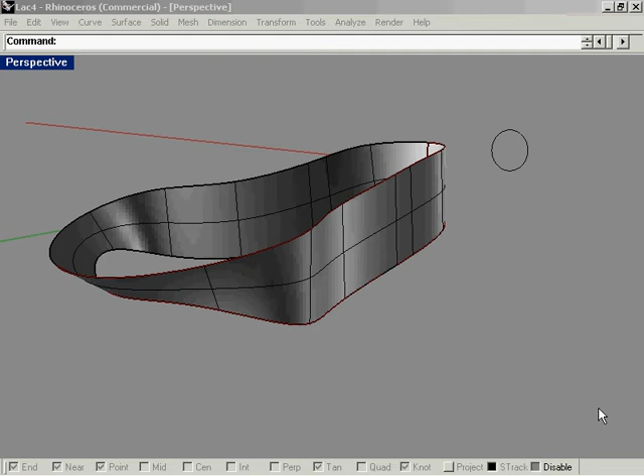Alright, so at this point we've created the rough sketches from the geometry that we had worked on before. And in this case, I've actually brought in one of the sketches that I was working on as an underlay, as a background bitmap, using the same techniques we've used before into my right-hand view.

The general strategy that I'm going to use here is to actually create the main surfaces first. Now, in this situation, main surfaces are really not all that visible because they're going to be cut out tremendously. So your main surfaces are actually what's going through here in between the holes. So you've got like a poly surface that will be consisting of something of a section like this, where you've got a chamfer on top and a longer, bigger surface in here, which then gets cut into, and then a chamfer running along the bottom as well.

Now, I'm actually going to add a little bit of a flat, like a ribbon or a rim running along the bottom, just to give a little bit of resolution to that bottom surface, make it a little bit stiffer, possibly give some more space for all these extruded holes that are going to go through for your pocket creation.

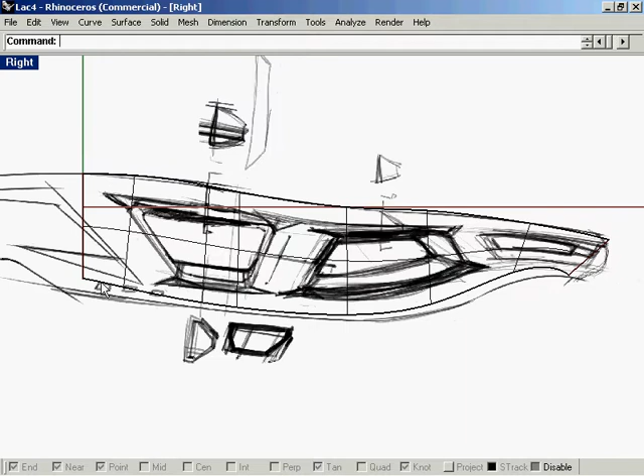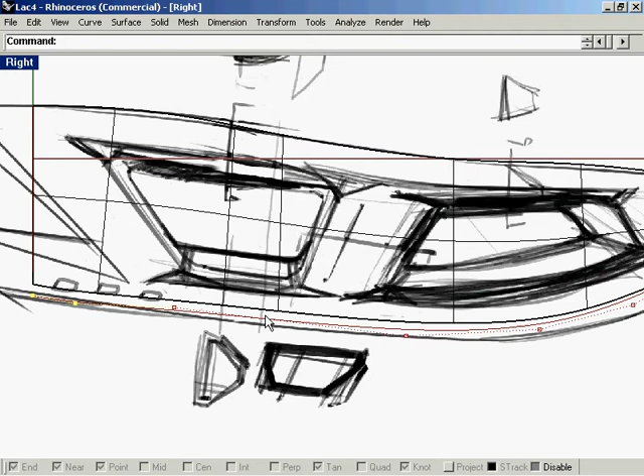And let me go ahead and just modify this geometry somewhat. Make sure that all the control points are turned on. Notice now, if I just modify the bottom control points here, now the curves are approximately following this curve right now because we didn't modify all the lines. So make sure that all the control points are turned on, and let's move that down.

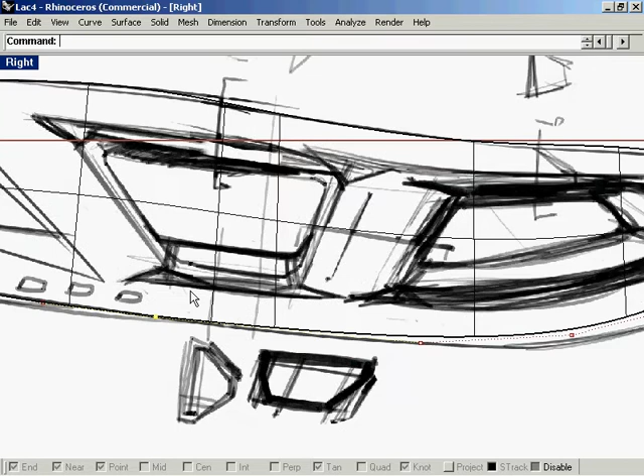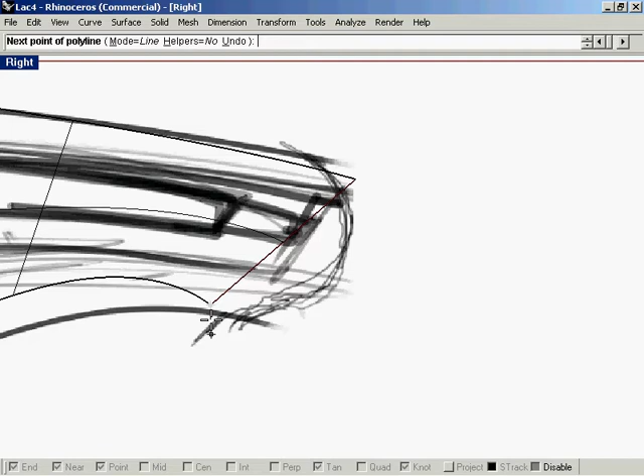I'm going to leave this geometry more or less similar and put in a polyline at the front to create that rim we were talking about. And I'm going to make that roughly tangent to the profile, 4 millimeters in length. So now it's constrained, roughly tangent. And let's do the same thing at the rear here. 4 millimeters. Okay.

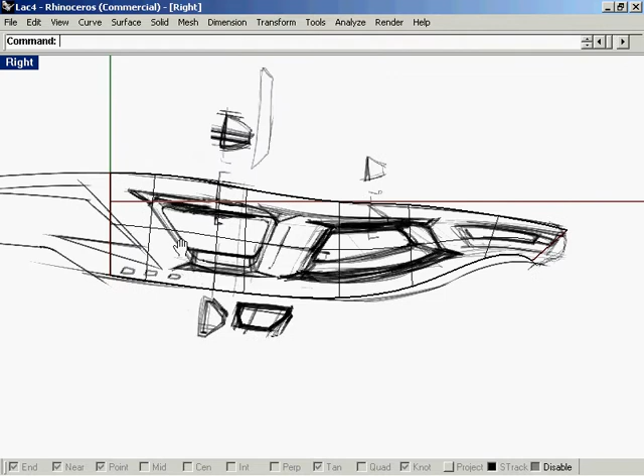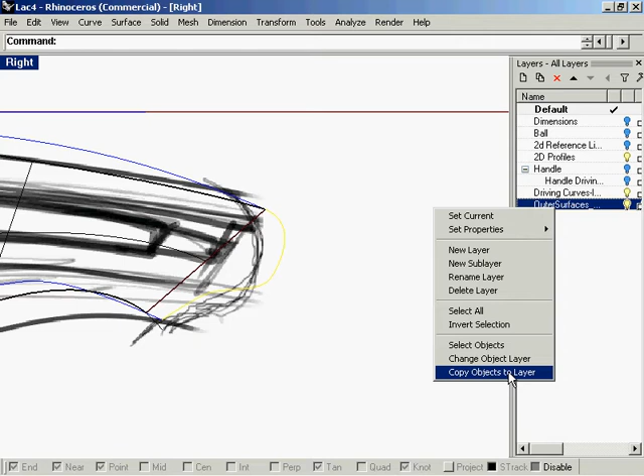Now we have a line here. I'm going to create a new layer called outer surfaces curves, and Copy Objects to Layer from the older 2D profile.

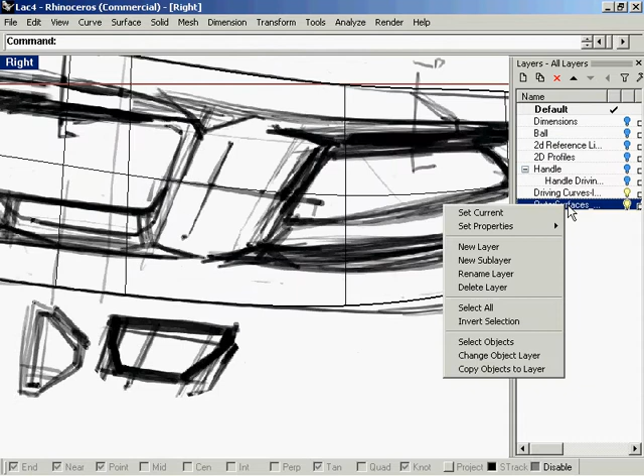And I'm also going to, well, actually, let's modify that right now. Well, I'll assign those rim curves to this outer surface layer as well. Okay, turn on the control points for that and snap it to the rim that we're going to create. Cool.

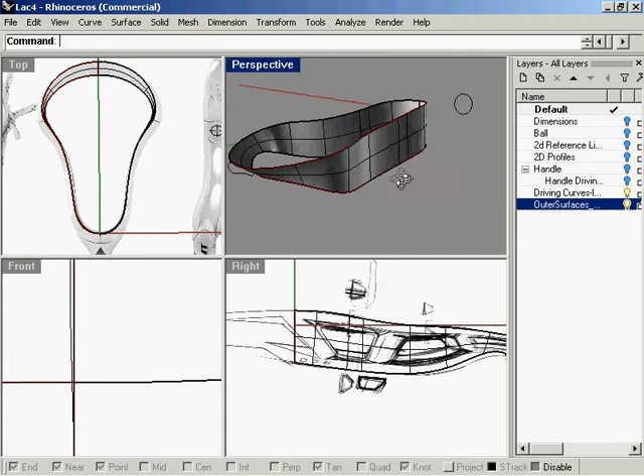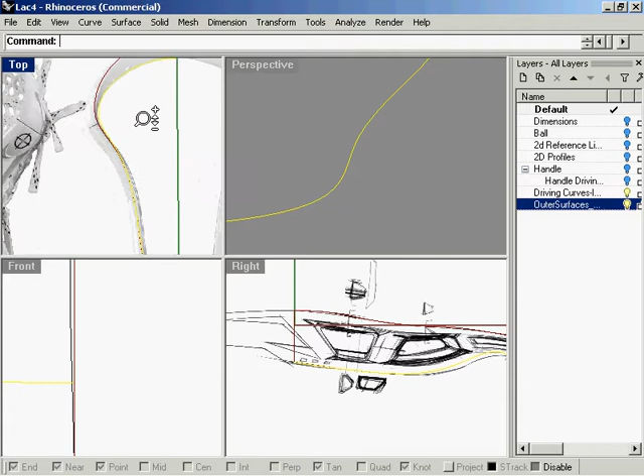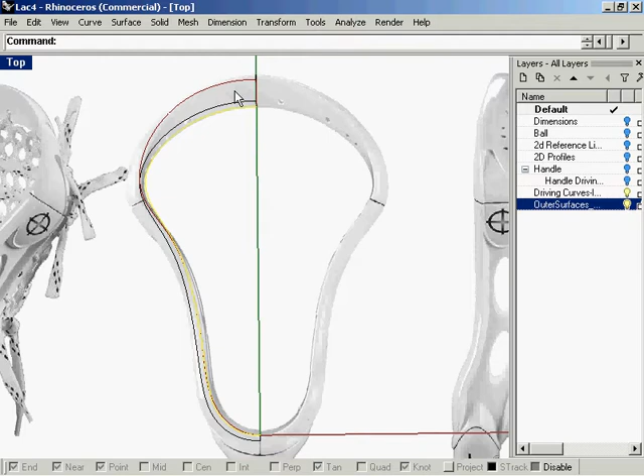Alright, so now let's go ahead and I'm going to offset this curve now. Hide that inner surface. I'll hide that inner surface too. Simplify things a little bit. And offset curve by 4 millimeters. Now this is going to be just for our reference only, because now if you turn the control points, you'll see that it is a very big or a very heavy curve. I'm going to use that as a scaffolding or just a reference point now to scale the existing curve for the inner surface.

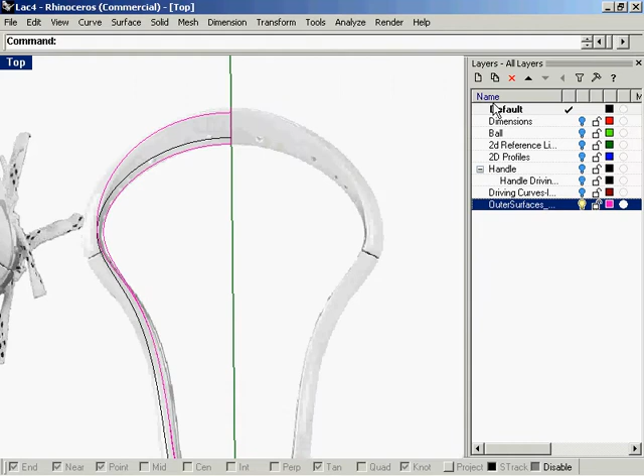Copy that object to the outer surface's curve layer and do the same thing for the top curve as well. In this case now, I think I'm going to hide those curves. Now they're all black. Maybe it's better off to change the color to something more visible, purple, since it's the same black as the color for the default layer as well.

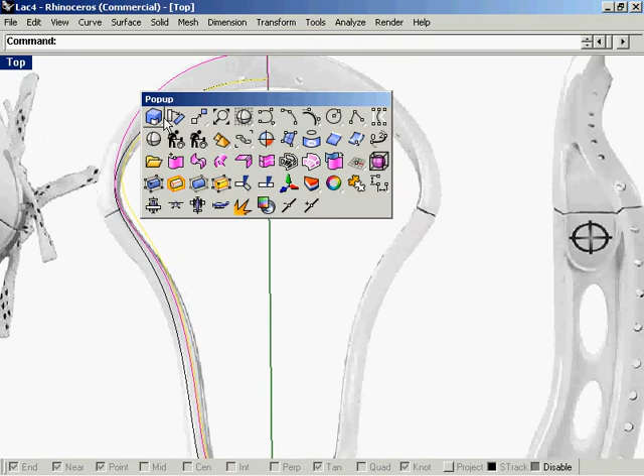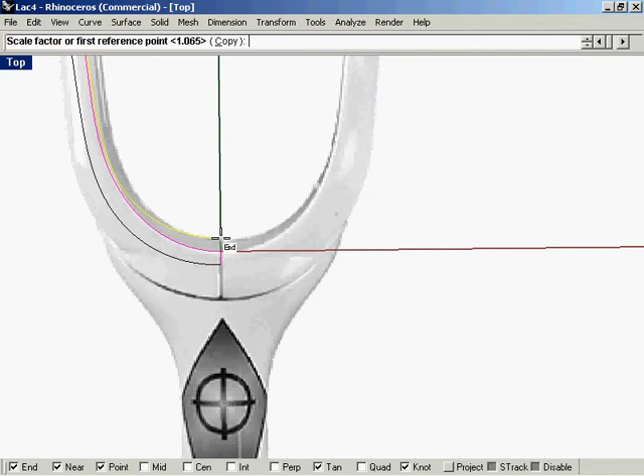Okay, let's now move this curve to the end of the line there, and we'll do a 3D transform. That didn't end up right. Let's try that again. From the top here, there you go.

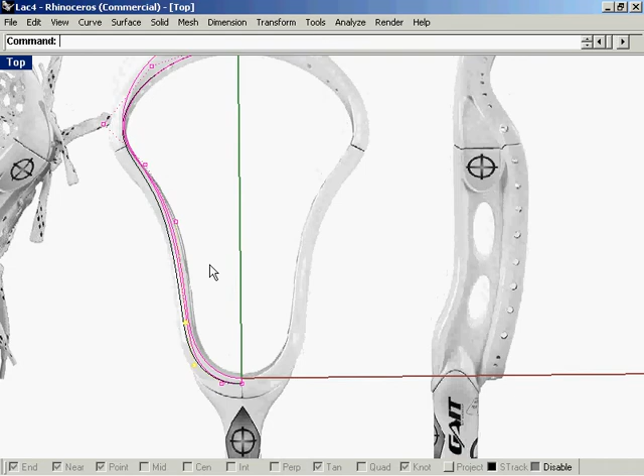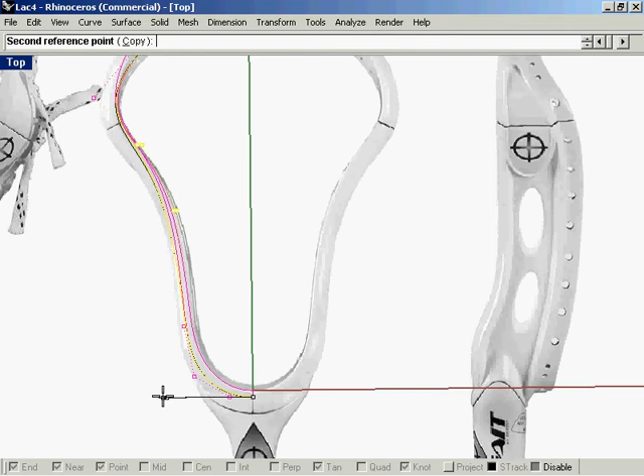And turn on the control points, and let's do a 2D scale on here. Actually, a one-dimensional scale on those control points. Let's look at it in the perspective view.

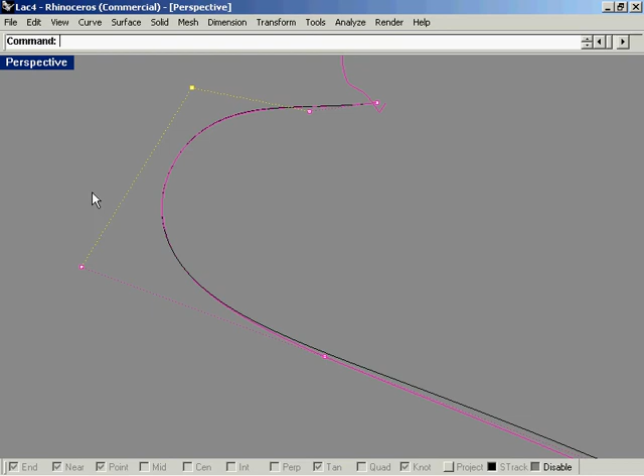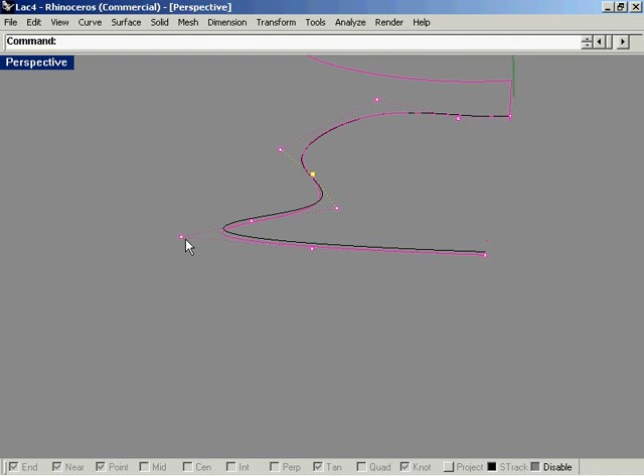And again, at this point, it is very visual. This is a lot more of a sculptural object, so that's why it makes sense to do this. It's an injection molded plastic part. It's not mating up to anything else. There's no corresponding female or male part this needs to mate up to, so an eyeball is probably going to give you the better visual result, because it's not just a straight offset, and you can probably play around with it just a little bit.

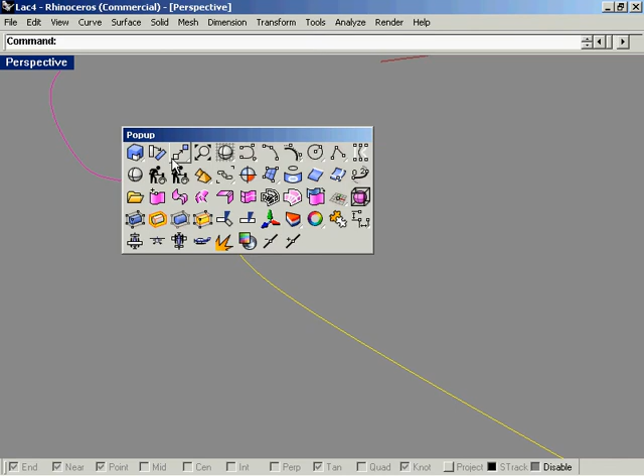Let's also make sure that, hide that. Move it to the construction lines that we've created before.

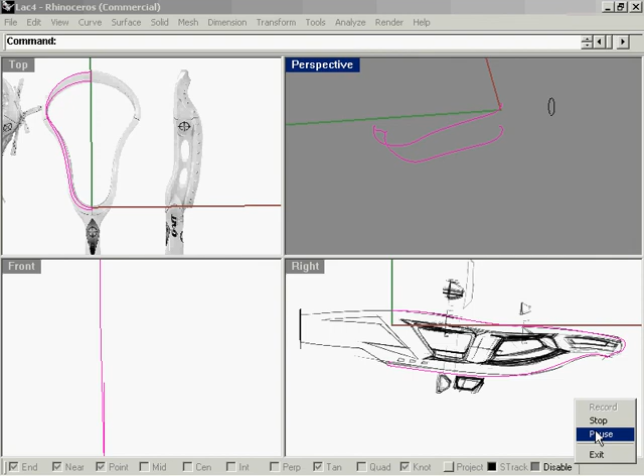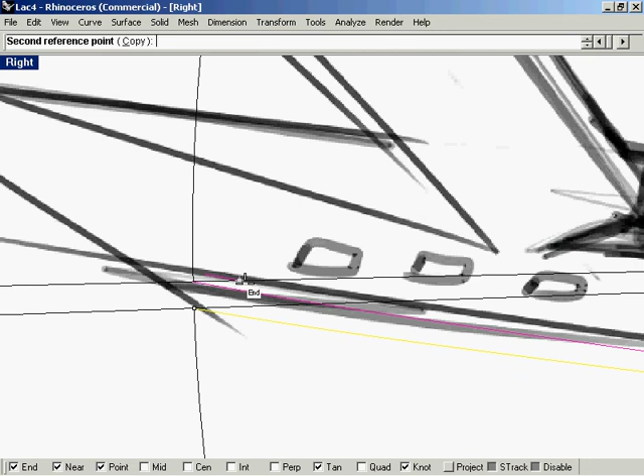And let's rotate this curve. Get the end of that line here. Line it up with the beginning there. Actually, we should have. Yeah.

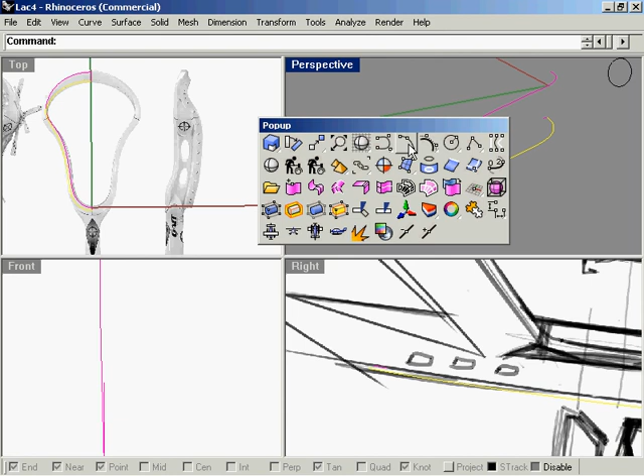And let's do a rough scale on it as well. Awesome. And let's turn back on